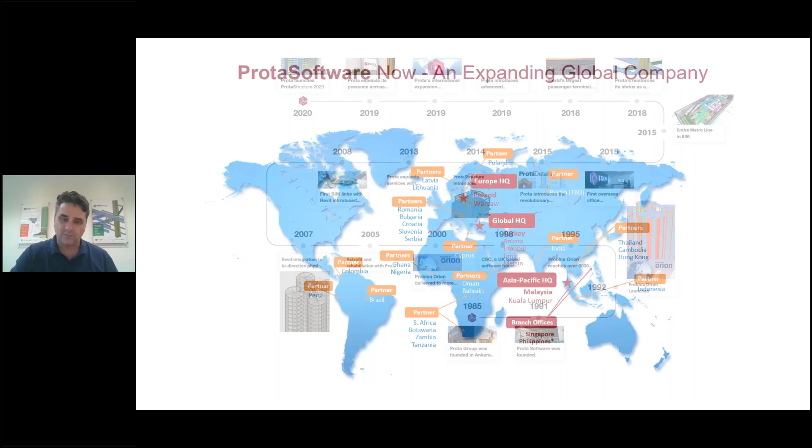I thought I'd give you some background about the company and a little bit of history around the software. We first started back in 1992, and we created what was then the first reinforced concrete design and detailing system, way back 28 years ago now - that was Prota Orion, and it was very successfully used for many years around the world. That was the first system of its type introduced into industry.

We continued to develop that, and in the early days it took a route of focusing on earthquake or seismic engineering, and in particular rehabilitation and retrofit of existing buildings. In places like Turkey, they have severe earthquakes, and there was a period where significant earthquakes occurred, and a lot of private and public buildings needed to be upgraded and retrofitted to meet new rigorous earthquake standards. We introduced a lot of capabilities on that front in the early 2000s.

This moved on, and in 2007 we were one of the first to actually integrate our physical models with Revit, so we had bidirectional links with Revit Structure many years ago, if you might remember. Being able to communicate that physical data is something that's carried on over the years and is quite a strong point of the software.

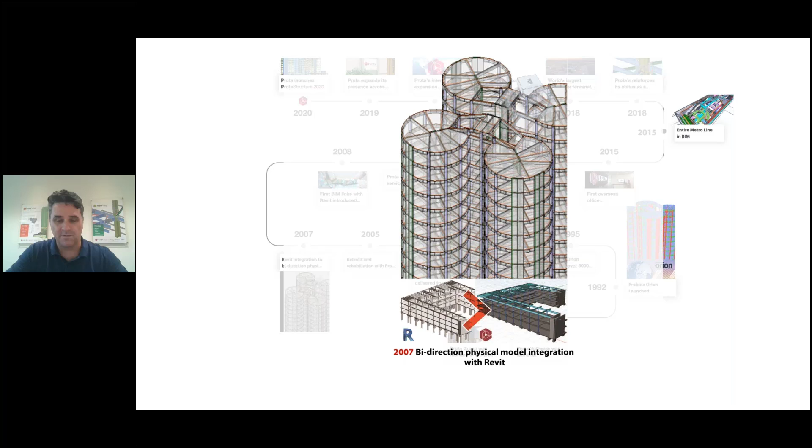We took the opportunity to redevelop the technology in 2014, and that's where ProtaStructure was born. ProtaStructure is a multi-material system for modelling, analysis and design, and I'll get to that in a little more detail in a minute.

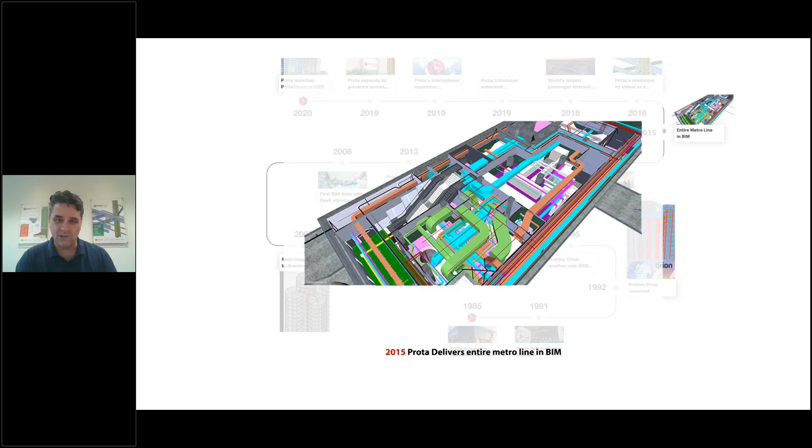Now, not to be outdone by us, the engineering side has also been heavily involved with BIM technology and implementing that on their projects. In fact, we were one of the first to deliver an entire metro line completely using BIM tools. From the architecture, the structure, the services, the construction, the alignments, everything being done using physical models and the latest BIM technologies.

That carried on, and then in 2018 we introduced the new international airport in Istanbul, which is, if you've been through it, I had the privilege of going through about a year ago. It's a huge airport, absolutely massive, and it's quite an interesting design and structure to service what will in the future be a very, very busy hub. So that gives you some insight into what we've been doing.

I just wanted to take the discussion into perhaps what you're doing as engineers, and I guess as engineers we like to emulate real-world physical scenarios. So to do that we create models, and they can be little wireframe analytical models through to physical BIM models. We then obviously need to move that down into actually looking at design, and the first stage of that is performing the analysis and then taking that into design.

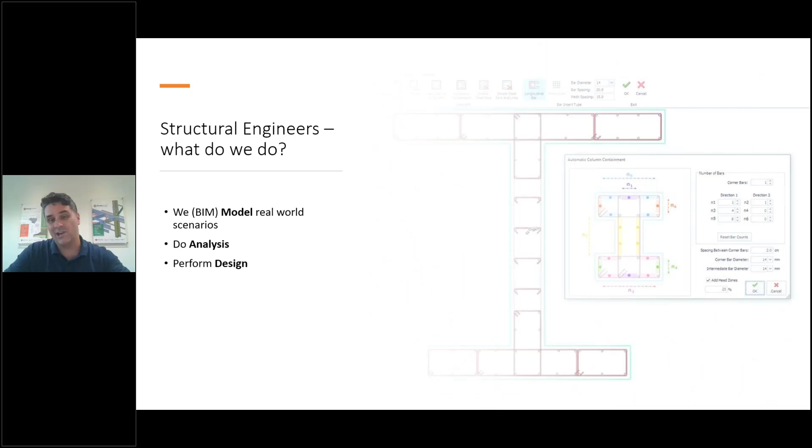So, designing all the elements within the project. Increasingly then you're having to communicate that in the form of drawings and create your detailing to convey that to site. Increasingly though, we're seeing more and more engineers and practices being asked to create fabrication or constructible information, and actually providing shop detailing, providing information to facilitate the construction.

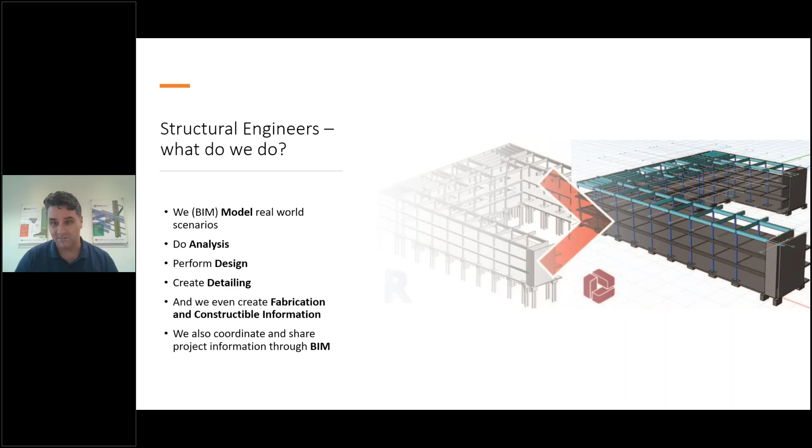And obviously a real hot topic at the moment is BIM and being able to share information, share physical information, data, all sorts of information which makes up building information modelling, and being able to coordinate and collaborate with different parties across different projects. So you, as an engineer, you've got a lot to actually have to handle - modelling and analysis, design, detailing, fabrication, and BIM. That's actually quite a lot to take in if you're a consulting business.

Now we recognise that traditionally you've probably been using discrete tools to help you deliver these processes. So you may have been using STAAD or SAP or ETABS perhaps for your own modelling and analysis. And they do some design, but mainly just elemental design, maybe component design, but some of them don't actually deal with everything. So you've got to design other things separately, things like retaining walls and drainage - you would have other tools for that.

So you've also got detailed design checks that are associated with the models - things like being able to check for lap lengths, checks for anchorage, all the other associated things that go into completing a design, and sometimes within these packages that level of detail is missing. So then traditionally you'd take all that information and pass it into a platform like AutoCAD. You might be passing that by just drawing up some sketches, handing them to a draftsman, who then goes away and conveys your intention into drawings.

But when you look at the CAD systems out there these days, a lot of them are quite generic - AutoCAD, BricsCAD, G-StarCAD - they're all just generic CAD platforms, not really dedicated to helping you with the kind of structural detailing that you may be typically doing. And then you may even be moving down into fabrication, and often at this point all of that information gets binned, and you're having to start building fabrication models from scratch, using different software like BOCAD, Advanced Steel, maybe Tekla Structures. There's lots of different programs involved with this whole process.

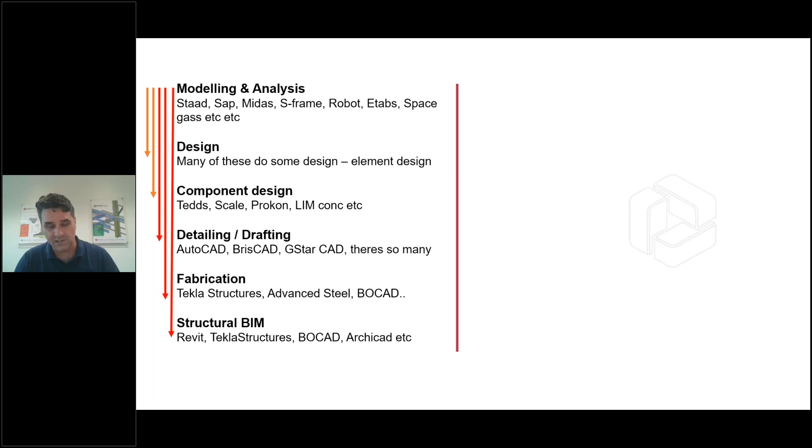At the end of the day, sometimes all this information isn't moving between these different steps. You're losing out on information held in silos, unable to communicate downstream as you move into the design process.

So what we've done is create a platform dedicated to modeling and analysis for buildings, a real dedicated program for that. Then that moves into design, right down into the detail, things like steel connections, concrete beams, designing core walls, foundations, and the like. Then we've developed a CAD software, a really brilliant CAD software focused on structural detailing.

That's about providing you with your structural detailing, and it also facilitates component design. So other items on a project outside of what may be required for a building, perhaps a retaining wall and the like, you have those components available to you as well.

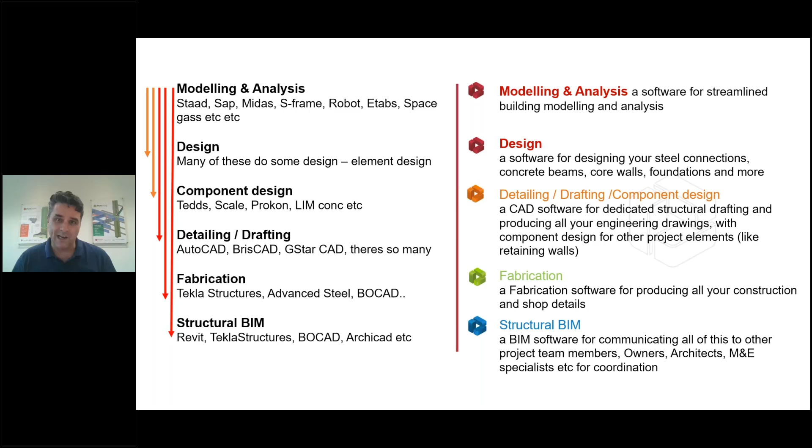And not forgetting fabrication. If you're looking at expanding the scope of your services, we've also developed a platform for aiding with producing fabrication information. And finally, a platform that allows us to communicate with other BIM platforms, structural BIM tools, other architectural and other types of BIM programs that allow you to communicate your project with different parties.

The idea has been to integrate all of this. So modelling, analysis, design, detailing, fabrication and BIM has now been created into one integrated platform, one solution. This has culminated, particularly this year, with the introduction of ProtaStructure 2021. So this whole vision is now coming together and starting to be realised.

So what I'm going to do at this point, I'm going to turn my camera off so you don't need to look at me anymore, and I'm going to actually show it to you. Rather than me spending time here talking, I'm just going to get in and show you what we've been up to. So I'm going to launch the ProtaStructure platform.

Okay, so this is our brand new platform. It's been rolled out to our user base. This was released about 8 weeks ago now, and any of our existing users should have this. We would thoroughly encourage them to start taking advantage of the technology.

The first thing people will notice when they first arrive into the new platform is a brand new interface, and we've got a brand new welcome screen that just helps you get up and running. Any projects you've perhaps been working on before can be loaded on the left here, and you can visualize those. We've got new interactive news and video feeds.

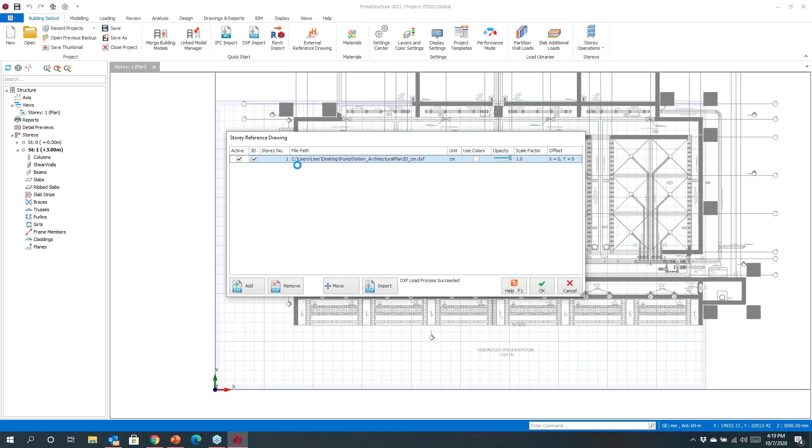So I'm going to come in and pick up a drawing, and this is actually a DXF file that's come in, and this file includes some predefined structural elements. I can come and choose the scale here I want to work with in the drawing, and we can show this in the plan view. Okay, and you can see here that this is actually a pump house drawing, and in this pump house drawing there are actually some structural elements which have been laid out.

So they could be columns, beams, walls. Now these are actually 2D information, but what we've done with this new release is that we're able to actually take some of this 2D information and extrude that into 3D. So we're trying to help speed up the process. So if you had old key plans from previous projects and you wanted to use these to perhaps create your structural models very quickly, you could take advantage of this.

Now I won't show you the slabs, I'll omit them, and I'll just pick this up, and you can see here that we've picked up the relevant layers.

You can default things like, if you've got two lines representing a beam, you want to signify a default depth. That can be done here, same with thickness of slabs. Then you can just import this, and what we're doing now is taking that 2D information and extruding it out, providing this in 3D.

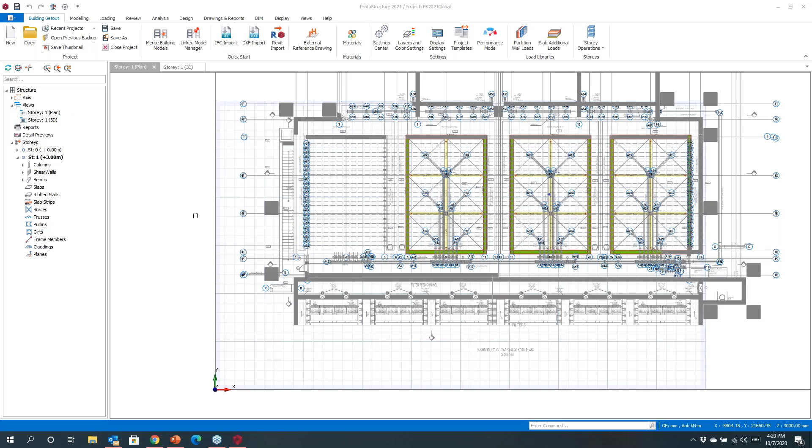If I just close this, you might see that there's some structural elements now in that model. I'll show you this - you can see it currently in plan view, and I'll show you what this looks like in 3D. You can see it toggling this, and you can see the 3D view.

So we've automatically brought in these elements, extruded them from the 2D information that we had. You can also see that we've got the overlay here - this is a pump house, and you could carry on and continue to model and enhance this. But it's just one way in which you can start to work with a range of different information from a project.

Now I'm going to create another one, and I'm just going to draw from a similar example, just to show you perhaps another way that you could work with this. This time around, I'm going to create a model from DXF data.

So this could be maybe a general analysis program - maybe you've been using SAP or STAAD or something like that. You've actually got a model and you want to bring that into ProtaStructure. Well, how would you do that?

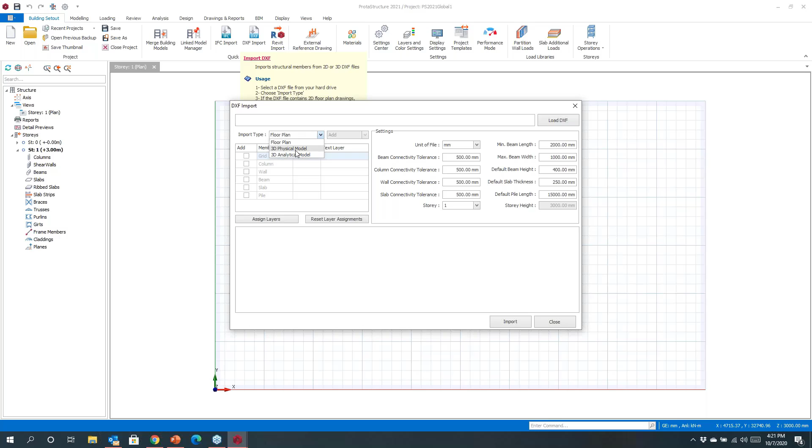So in here you can import floor plans like I showed you just now, but you can also bring in physical models or 3D analytical models which are in DXF format.

So I'm just going to choose a file here, another one, and I can just open this. You can choose the units again that you want to use. Okay, it's picked up the elements, and then I can just ask this to import this model. So it's now taking this physical model and re-establishing this inside of ProtaStructure 2021.

If you just give it a second, you'll see that something's been done there, and I'll just close this down. If I just show you this in 3D, you can see that we've taken what was quite a complicated wireframe model and brought this directly into ProtaStructure, and then we could just start working with this to develop other parts of the model, having this within the model.

So that's another example that you could make use of, and you can also try the IFC imports, Revit imports, bringing physical information in at the start of the project just to aid the modeling process. The whole idea behind this is just to give you more speed, more versatility, allowing you to use more of the information that you might have available to you at the start of the job.

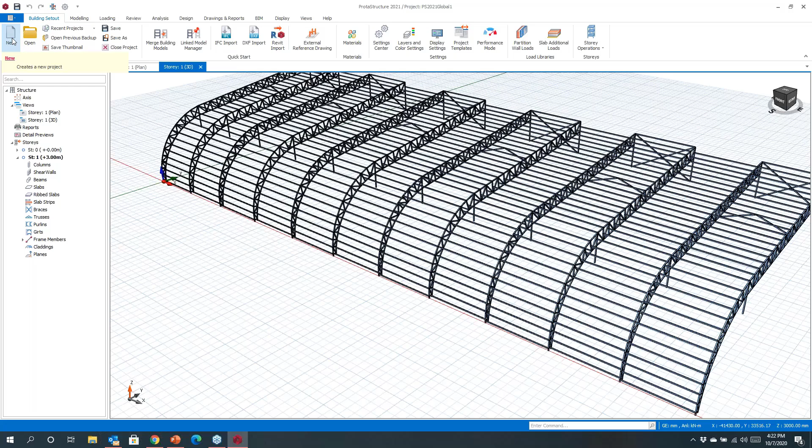Now, if you're not that privileged and you are wanting to just have to start from scratch, I'll just create another project here. I'm just going to show you that process, and work through a quick model here just to show you how you can take advantage of the new platform and the new technology that we have.

Now, for those of you who are familiar with ProtaStructure 2019, we've not tried to reinvent the wheel, so you will see that a lot of the dialogues that we have in here are familiar to you. So it would be a very natural progression for you, albeit that we're in this new interface.

Across the top here, you can see that I can start creating my model. I may just want to come and initially just set out some grid lines. I'm going to do that, so you can key in the axes yourself. If you had them in a CAD file, you could bring these in - it's very flexible. You can just import those, and then you can see that you've got the grid line arrangements there.

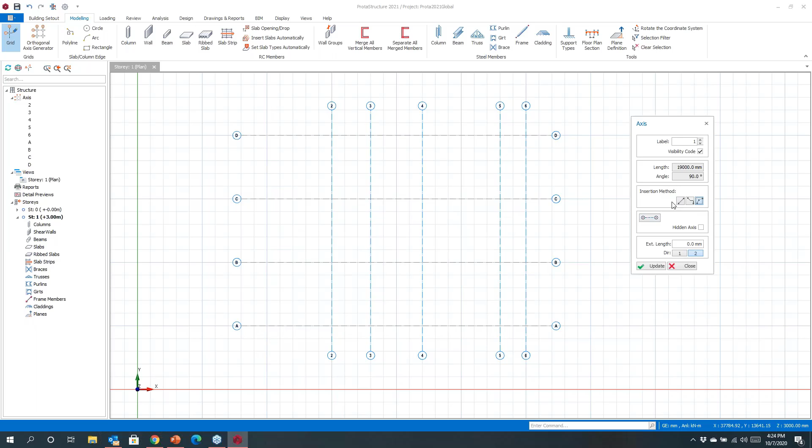Now, if you select an element and right-click, you can go to the properties of that, and you can see that the properties of that axis are associated there. I can come in and modify this - so if I wanted to maybe change this grid line so that it's actually a curved axis, that can be easily done.

Okay, I can just take this information and start to work with it to create what it is that I'd like to have within the model. So just selecting the elements, I can load the properties. I can come in and remove that axis, and then recreate the axis with similar labeling and properties on top of that.

So if I have a grid line that's not exactly straight, maybe it's an unusual grid line, I can come in and model that. Maybe it's a facade of a building. That's the type of thing you can do.

So if I just work my way across, next thing I might want to do is apply some columns here. And if I just click on a column, I can insert these and place the columns in the model. You can work with different objects here, different shapes, so you can create other objects there. I might want to align these along the curvature of that grid. I can easily come in and do that.

If I have maybe columns which have different properties, they could be steel, could be built up sections, cold form, or even composite. You can come and define these here and create them within the model.

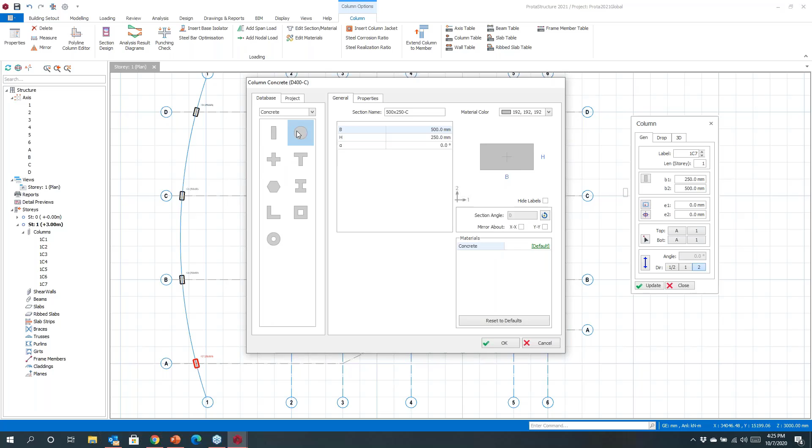So I'm going to put in maybe a concrete column here, could be circular. The underlying engineering properties are calculated, and then we can just come and grab these and put them in the model.

So quickly here you can see I've come in and defined some columns there. Now you can work with these if you find that maybe the column orientation here, I don't like it. I can just come and pick up a column, reorientate it, reposition that column. So all of this is editable if I wanted to move that.

Okay, I can also use my cursor keys, and you might just see that I'm just adapting this a little bit to suit the geometry. So you can just tweak things in here very quickly to suit the set out.

I'm going to put in some walls at this point, and I'm just going to run across and create the walls. Now what you might start to see is that there's a contextual ribbon here, and I'll explain a little bit more about this in a minute.

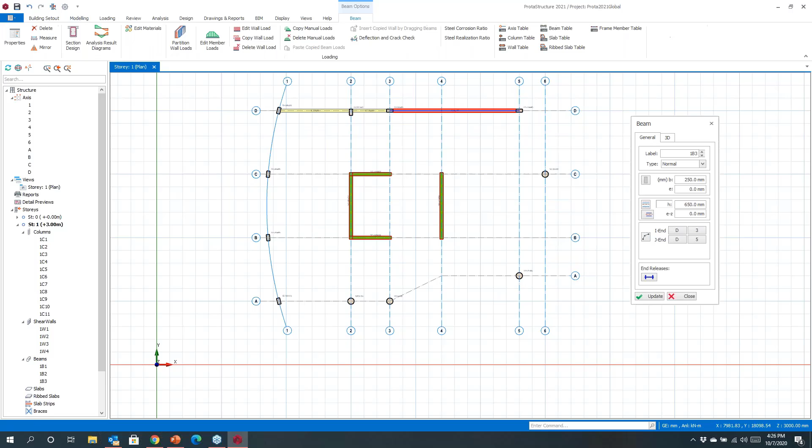But if I just come back to the main modeling environment, when I do start to put in elements like beams, you'll see that the contextual ribbon will appear, and this gives me additional features and functions that I could do as I'm creating these beams.

So you can see I'm just running around here. I'm putting in a funny beam that's followed the facade there, the diagonal beam. We've got some curved members there. I may want to just box around and put a lot of members in one area.

It's asking me if I want to split members. I don't want to do that. So you can see that I'm just really quickly coming in and creating the underlying model here. This is significantly faster than previous editions. You'll see it's much more responsive as you're creating the model.

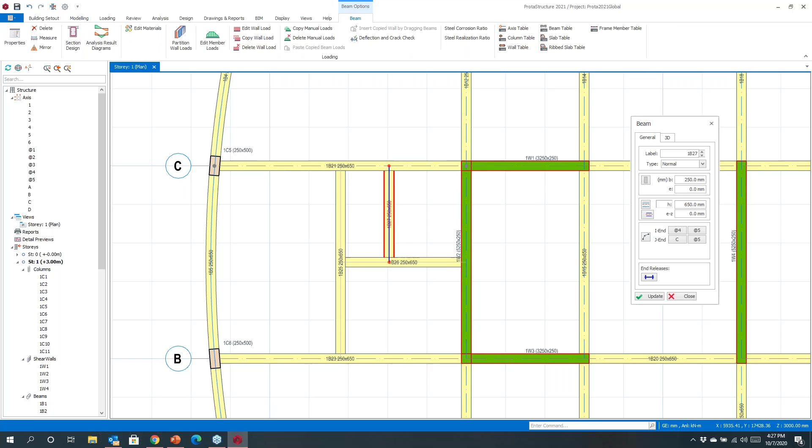Okay, you can snap to points, or you can actually key exact distances in as you're going to create things in here and position things accordingly. And as I mentioned earlier, you can just tweak these to adjust them to suit what it is that you're wanting to create. So if I want to move these columns into a different location, I can just adapt these accordingly.

I'll get into the slabs. So if we click on the slabs, you can key in a thickness. If you're not sure about things like live loading, there are tables in here that you can draw from codes. Eurocode, for example. It could be bedroom and dormitory.

If you're not sure about the superimposed dead loads, you can build these up in terms of libraries. So you can just quickly come and create these and create your slab location where you want it to be. Now, of course, you can key your own values in here. If you don't like these values, then this is all adaptable.

Okay, maybe you've got a toilet area with different types of finishes. Again, you can just come and choose those and put those in the model. Of course, you can key your own values in here too. So if you have a different live load value, then that could be established here.

Maybe I've got something that's a bit higher, just by the lift core there. It's entirely up to you, you can just drive this process as you go. Now I'm going to do some other things, reminding existing users of additional features as we go.

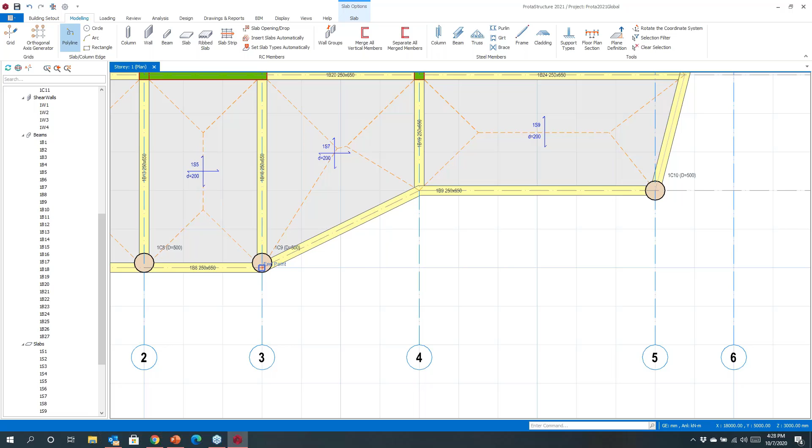We also have things like sketch lines that you can use to help set out unusual geometry. Here I'm running around creating a profile that I might want to use to define a slab. You can have different types of slabs and set these up how you want. I might make that slab a little thinner, or drop it a distance, and then just create that in the model.

Very quickly you can make use of tools like that to set out things that are a little unusual. Now, earlier I was talking about this contextual ribbon. If I click on a beam, you'll see along the top everything associated with that beam and additional features are highlighted to you.

You can also right click to get the same menu, but we've made this more interactive. So if I clicked on that beam and wanted to edit the wall load, I could interact with that dialog and create some wall loading on that beam.

Now that particular wall load, I can copy using Control-C. I could select some perimeter beams, and use Control-V, and it will copy and paste that information. We are trying to take advantage of familiar things that will be useful if you've been using other systems like Microsoft.

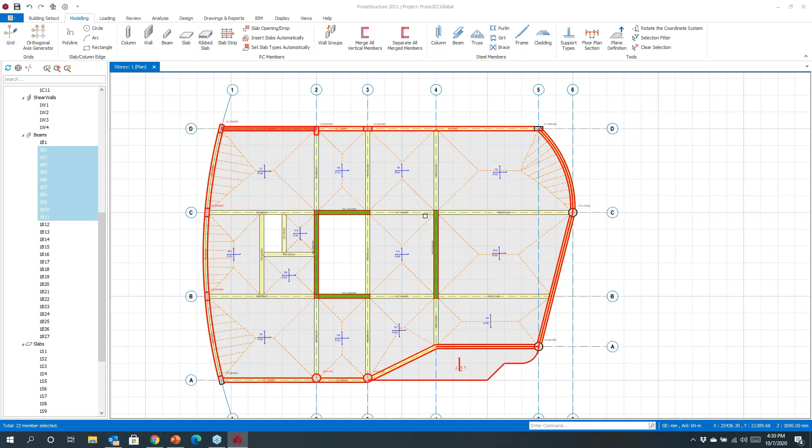Now I'm going to look at these walls in particular. If I select these walls, you'll see I then have the option to merge them, so that's now a merged wall. If I select that wall again, I've got the open dialog here. I could add extra loads to this wall, or go into the polyline wall editor.

We've done quite a bit of work with the walls in this release. Sorry, let me just load that again. It's loading. Let's try one more time.

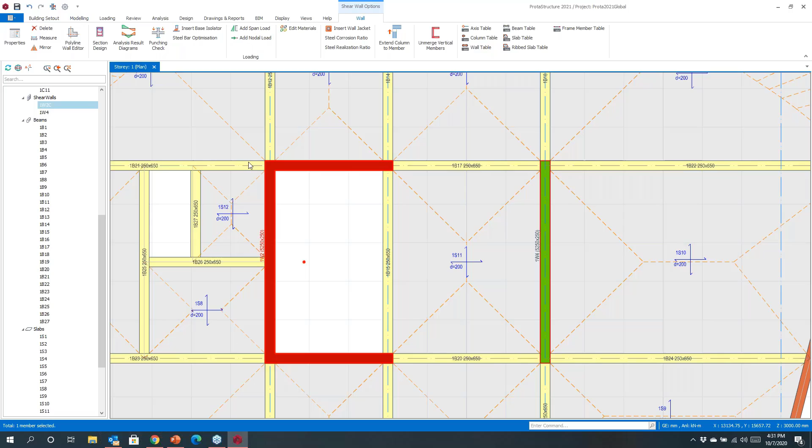Okay, so you can see the polyline wall editor here. This is an interactive wall editor you can work with independently. Maybe you want to introduce some end zone links. You can drive this manually and type in distances for things like end zones. These can be symmetrical, and you hit OK to create end zones.

You can also come in here and click to create other types of links, so insert a link around that whole boundary. You can use this just to define and create different types of... sorry, let me just get the way this is working properly.

So you can insert a link type here, make another link around the entire boundary, and drive this detailing. You can actually come in here and manually start to create and build certain specific types of detailing you might have for walls. But I'm going to delete that because that's quite a manual process.

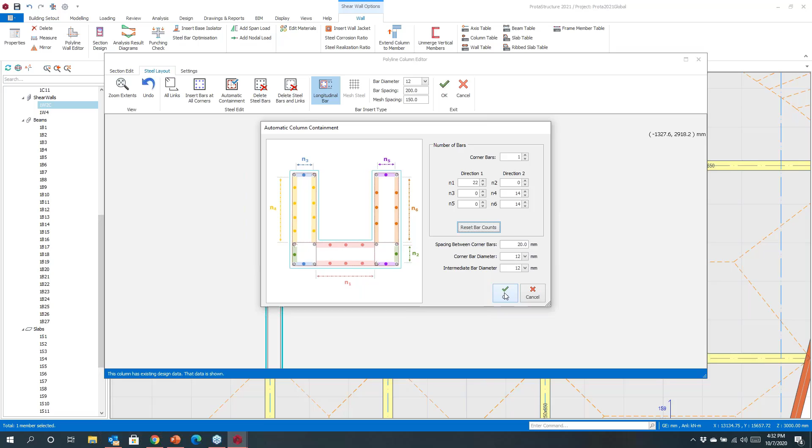What we've also done with this release is introduce automatic containment for unusual or merged wall shapes. So with just a click, I've actually created all the bars and a template that I'll want to use for design and detailing for the walls. Depending on the code of practice you're using, there may be specific detailing provisions required for seismic and the like, but this will adapt to those, and you can use this as a template for the design. If I just hit OK, it's now going to use those bars for doing design.

We can selectively use that for other types of elements. So if it was a polyline column, for example, you can work with these to create unusual geometry and shapes.

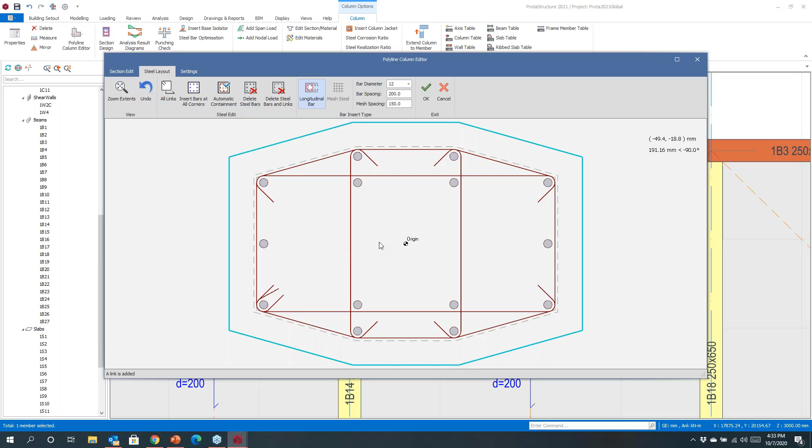So you're not constrained by what we have in the basic library. These can be driven, so you can automatically contain things here. I'm just drawing out some additional links and ties that I want in the column, so you can have multiple layers of bars. You can use this to define a template to create whatever you'd like in your model. All the standard shapes will be automatically designed and detailed, but if you've got unusual things, you can use this to help create those.

Now I've been working so far in 2D, and in the tree here we can come in and selectively open up other views. So here you can see a 3D view of this. These can be toggled, so you can look at different views. If you have another machine, maybe you want to pull views off to another screen. If you've got a couple of screens, you can take advantage of that, particularly with bigger projects, that would be quite useful.

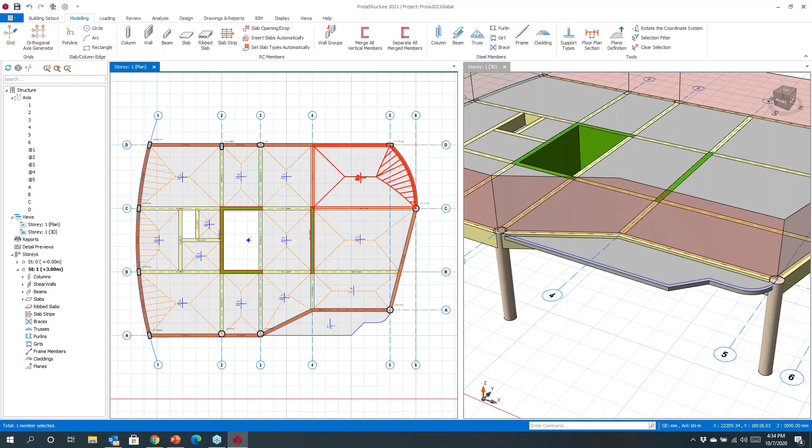I can then start to work with this further, working in both the plan view and the 3D model. I'm going to come in and create some other parts of this project. I might want to come in and create some openings in the slab, and we can do that.

If you've got things like polyline drops, let's just create them. You just bound the shape you want to use in this particular slab, and if I finish that, you'll notice that this slab is actually dropped. The idea is that I can create whatever type of geometry I have here, and we can use the physical model to help drive this.

If things have to move around, you can just reposition them accordingly. If you want to introduce an opening in a wall, this can easily be done. Maybe I want to change the dimensions of that. You can just work with this to create whatever it is that physically you would like to present.

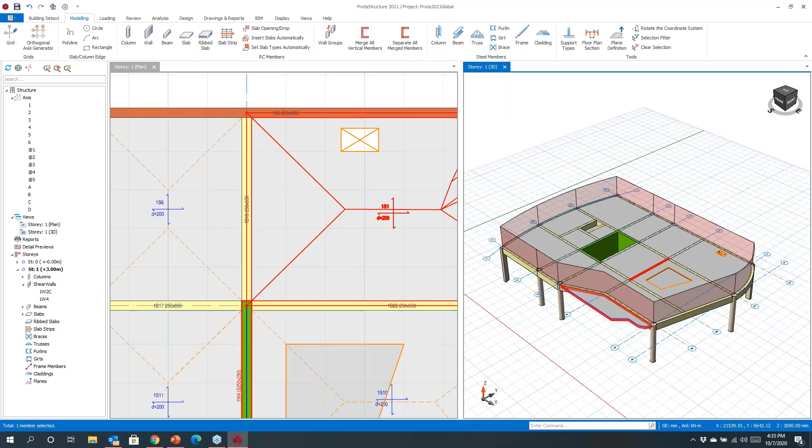Now, at this point, I may want to start generating information upwards. I'm going to insert a few floors, let's make this 5 storeys, and we can then start to take this information and work with it. If I go to storeys, I can right click and generate storey information upwards. You can choose what you want to copy, you don't have to copy everything, and I could just select these other floors. If I hit OK, you can see that information has been quickly reflected and generated up the building.

Now, you can interact with this model. It's very easy to make changes. If you want to delete elements, remove them, or make changes, you can.

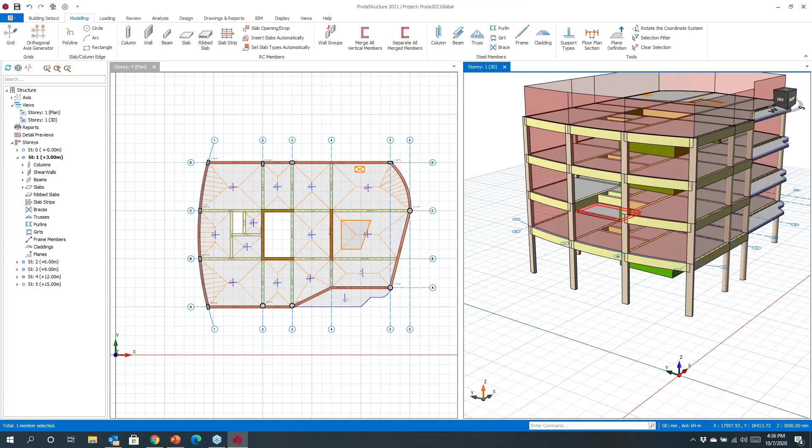Up here, you'll notice I've got an arrangement of beams at the roof level. I can come and choose to select certain elements in the model, so if I wanted to select the beams at that roof level, we could just box around them, and you can see they've all been selected. If I right click, I could remove those, so I'm left with maybe a flat slab at the roof level. We can then adapt this to suit the type of structure we want to create, so you have the flexibility to edit and make changes very quickly as you're progressing the model.

Okay, so I'm now at the roof level, and I'm going to touch on some new features we've introduced here as well. Let's just put in some columns initially. You can draw columns from libraries of different databases, so maybe I want to use a steel section, maybe a UC. We could just come in and select the appropriate section here.

Oops, no. Sorry, I've got a bit of a freeze here.

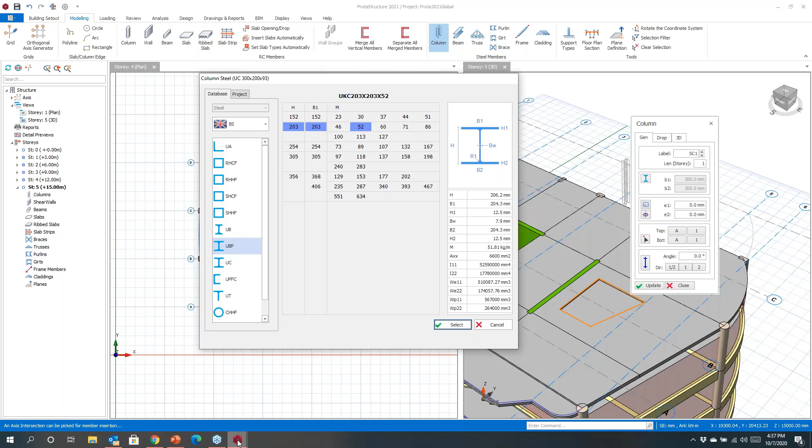Okay, let me try that again. Choose the section. Okay, let's go.

I can just take this and place it in the model. You can come and choose where these would be located, and these can be set out just to suit the project you're working with. Let me just move that box out of the way so it becomes a bit easier.

So they have a little steel structure at the top here. You can work with different elements here, and we've got these contextual elements. So here I want to create a truss. I don't need to key the nodes in to create that truss - I can just select between these two elements, and we can then move to create the truss in the model. Now, there are different ways this can be done.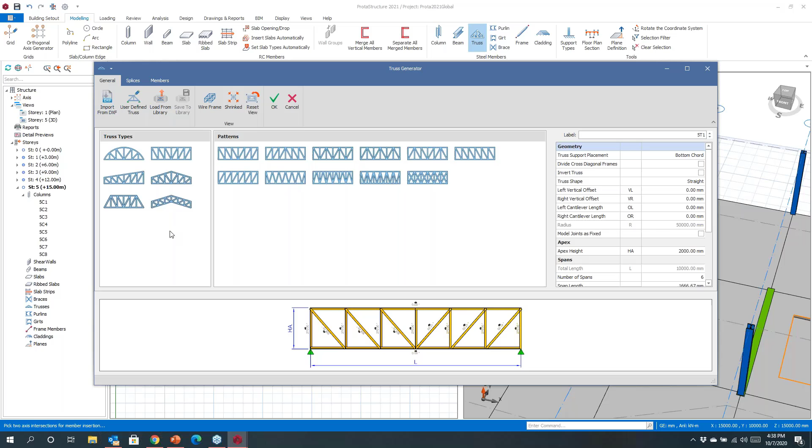Obviously we have a standard library of truss profiles that you can choose from here, and these are adaptable. But what we've also introduced is the ability to create whatever geometry you like. So if I had an unusual truss, I could make use of this to enhance the nature of the truss.

So I may want to put in maybe a top hat on this particular truss. You can key in some extra nodes here and coordinates, and you can see that these coordinates are created here. Now you can then work with these.

So if you wanted to add in extra points, I might want to add an extension point here for the top hat - maybe 500 millimeters this way, and then I want to create the same thing in the other direction. We can type that in and hit OK.

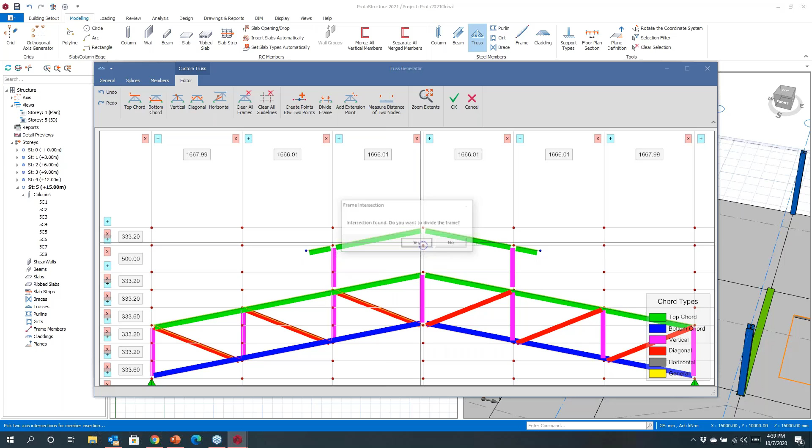Then we can just draw in the elements we want to have, so I could come in and draw these vertical elements here. I may want to add a top chord, so you can see the elements are grouped, and you can choose to define these however you like, then just come in and create the element. If you're happy with that, it could then be placed within the model.

I'm going to just remove that because I want to show you some other things as well. If I come back to the truss again and place this, you also have the ability to import from CAD.

So you could come in here and choose a truss that you might have sketched up in the CAD environment. You can play with the scales here, and then pick coordinates where you want the truss inserted - two coordinates to drive the insertion - and then you can import this.

Once you've got this in, you can work with the truss to help define different properties. So if I select this element here, I may want to set that as a top chord, so when it's being designed, it's designed as a top chord. The internals are the bottom chords - I could come and select some of the internals here and define what they are, so there could be diagonals, for example.

So you can work with this to create whatever it is you wish to work with in the model. If you have that information, if you've sketched it up in CAD, you can just bring that straight in and start to use it to define things.

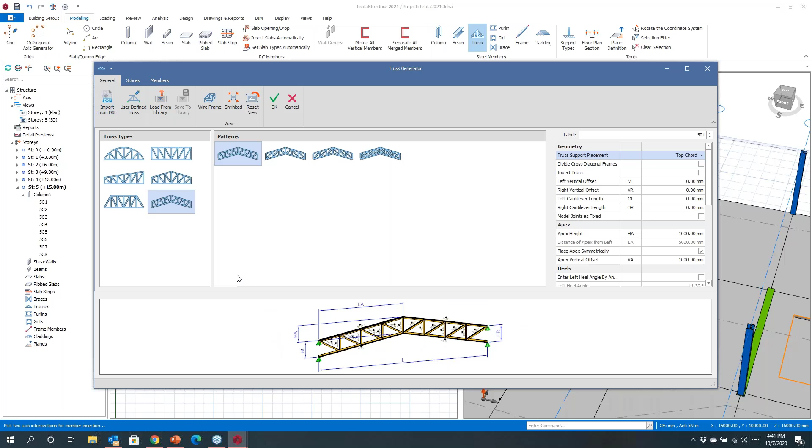Now I'm also going to create another - I might just use a standard truss this time, and you can see how this works. You can work with parameters here; these are very flexible, so you can use these to define the type of truss you might want to have. You can choose how things are aligned, and you can preview the truss before you actually create it. If you're happy with this, you just hit OK, then that gets created.

It then becomes available to copy and replicate elsewhere in the model. So I'm going to continue working with this.

Let's just put in, say, a UB, and you can choose different types of sections here at your disposal. I might want to play with the releases, so I want to pin each end of that, and I'm going to come and place my UBs here. So I can just quickly do that, and you can see that they're set up.

Maybe at the apex here, I want to change the section, so I might want to use a tubular section, maybe something a little bit bigger, and then I can come in and work with this to tie the top of the trusses together. So you can see here that I'm just working with the model to define these elements.

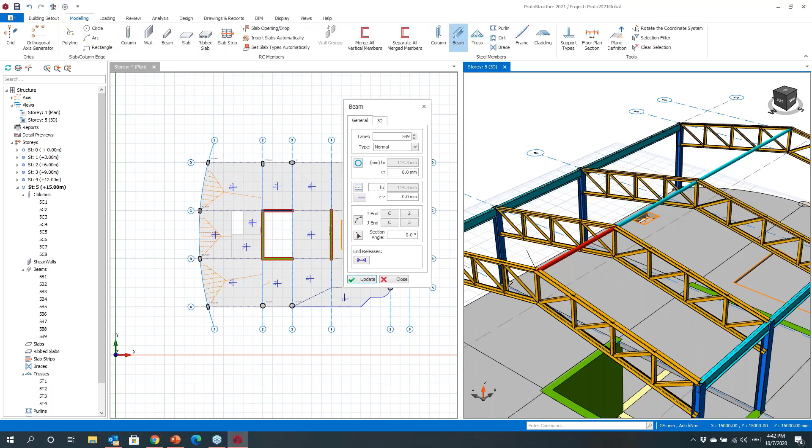Now, at this point, we may want to introduce other items, and we've got these other contextual modelling elements here. So I'm going to work with some braces. To insert braces, you can just click on these two, and it will preview a brace arrangement for you. Now, you can play with the types of shapes that you have here, how these are defined. All this can be set up here, and you can work with this if you want different types of braces - K braces, diagonals.

All this is adaptable. You can move these elements, so if you find that you need to adjust it on site, you can change that. The analytical wire can stay where it is, or this can move. So this is all adaptable to suit what it is that you would wish to create. Now, if you just hit OK, then those trusses get created, and those braces get created. You can replicate this on the other side, and the same properties will carry over.

What might be more challenging is this roof. So I've got a bracing system in the plane of these trusses here, and what we've introduced with this is that you can preview the trusses and the bracing arrangements here, and you can see the braces have been predefined for the top and bottom chords.

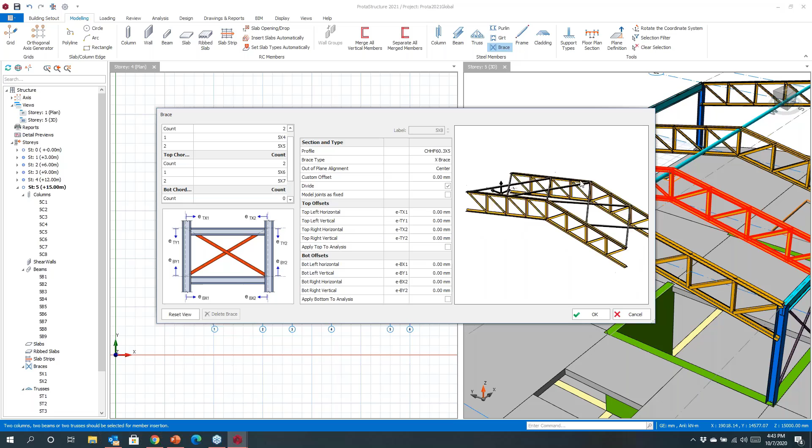And you can work with this, so I can make changes here. I might want to have a couple of braces on the top chord, and I may wish to have no braces at all on the bottom chord. So you can come in and define this, and then you can see that the preview there is adapting. And if you're happy with this, then you hit OK, and those elements will be created in the model.

Now, at this point, let's work with our purlins. So we can choose those end trusses there, and it'll also preview an arrangement for the purlins here. Again, this is an example where traditionally you may have had to go and draw all these purlins in if you wish to represent them in the model. With this, you don't need to do this - it's previewing an arrangement. All of this is editable, so if you want to change section sizes or use different types of profiles, in here you can, and they'll adapt accordingly.

Now you'll notice here that I've also modelled the sag rods. If I don't wish to include that level of detail, I can turn them off, or you can drive the way that they're detailed manually. You can also assign loads to this, which I'll get to, because we've introduced some other new features to help you with loads to this arrangement.

So if you're happy with this, then you can just select that, and that will be created in the model. Now the final few things I'm going to do in this model is I'm going to introduce some girts. So again, we can just click on the external perimeter elements there. We can click on the spacings here, or maybe I'll just turn those off. You can preview this, and if you're happy with that, then you just create - and again, those elements are created. I'll just finish this off here.

Now, the final thing I was going to talk about - a couple of other new things that we've introduced with this release - is we have a new option for creating frame elements. And these frame elements are very flexible, like a general frame element that you can work with. You can come in and make changes to use different profiles here to accentuate your modelling. So if you had a very unusual arrangement, you can use things like intelligent snap points to create that member and to set out unusual geometry.

Now, this member - you can fully control it. So if you want to release end moments, maybe you want to release torsional moments, maybe you even want to release shear - that probably wouldn't work very well. So you can play with this.

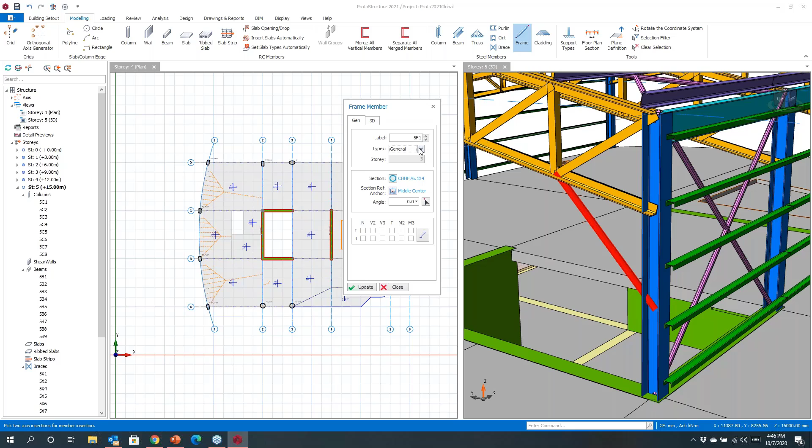You may have axial releases in this as well. All the render properties are fully flexible, so you can adapt this to suit the element in the model, and define these as other types of elements depending on what it is you're creating. This gives you the flexibility to create any unusual geometry you might have within your steelwork.

You can use the frame member element to create those models. When we imported those elements earlier, we started with the free frame member, and then you can define the type of properties for each element. For example, I imported the truss and redefined elements as top chord or bottom chord. Otherwise, they can be treated as frame members.

Now, another new feature we've introduced here is cladding. If I click on the cladding option, you can choose a panel of the roof. Let me try that again... okay, here we go. It should be a lot easier than what I made it look.

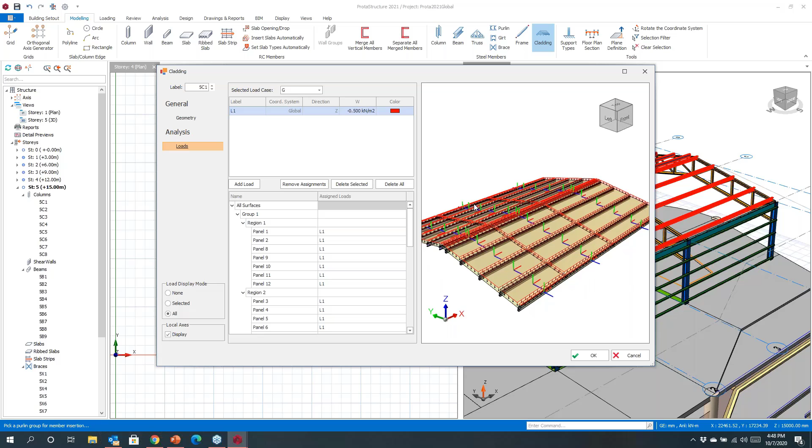So if I wanted to add loading, maybe the cladding loading for that roof, you can define the loading and then assign it to individual panels, or assign it globally to the whole roof. I've now assigned some dead load to that roof - it could be live loading, wind loads, or snow loads. You can come in here and establish those pressure loads on the model. It intelligently understands that's a surface, and then allows you to set up and create those loads and apply them to the model.

Okay, so we've covered a bit of ground. Now I want to look into the modeling analysis and design. I'm going to quickly generate some combinations here. Your pattern load cases as well as your lateral cases can be established here. I'm going to run wind loading as well as seismic. If I just hit OK, all your combinations are automatically generated for you, created in accordance with the code.

Seismic parameters can be established. Depending on the country, we have seismic maps you can draw from - here's a map of Malaysia, and you can choose an appropriate city to use. These will adapt - you can choose different ground types and the like, and each of these will follow through the associated code you're using. So whether you're designing a building in America or a structure in Thailand, there are various codes we support that allow you to create whatever type of loading you wish.

So I'm going to choose to run 10 modes here. We do some quite sophisticated regularity checks, and we do some really smart things for joint shear checks as well as strong column weak beam design. You can check those out - there are other webinars that cover this in more detail, but that's just to give you a quick overview.

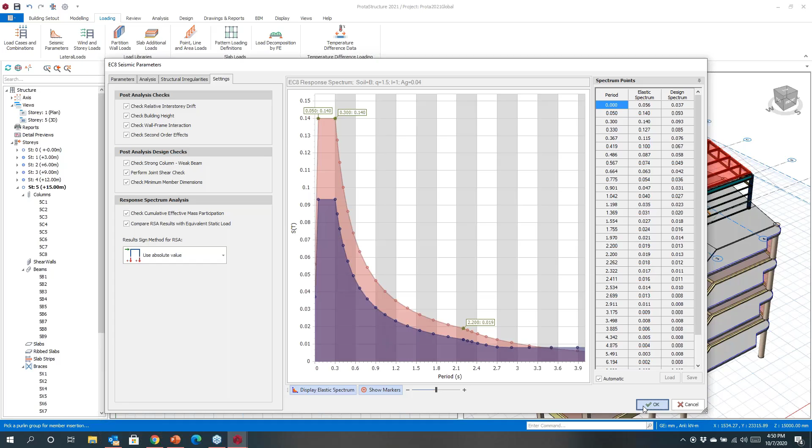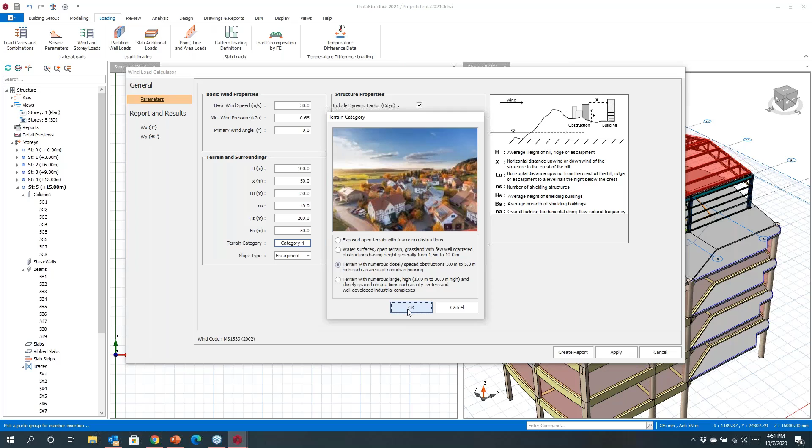Now I'm just going to quickly save this because I want to populate the geometry to allow me to do the wind loading. Wind loading is also automated - we cover a range of different codes, whether British standard, Eurocodes, or American codes. In this case, I'm running this to the Malaysian standard, which is a direct copy of the Australian code. Here you can come in and key in your parameters, your basic wind speed, topographical considerations. You can choose where the structure might be located, what type of structure it is, and work your way through the relevant code of practice.

We then automatically calculate the loading for you - pressures, loads, and so on will be automatically set up, and then these can be assigned and applied to the model. So this takes you through the process of setting up and establishing your loads.

At this point, you may want to quickly review the model before you get to the design. This review section allows you to quickly check things like your live loading, your superimposed dead loads on the slabs. If you've got different types of column sections, you'll be able to see what's being created in the model here, beam sections and the like. So you can just use this to quickly check your model before you get into the analysis and design process.

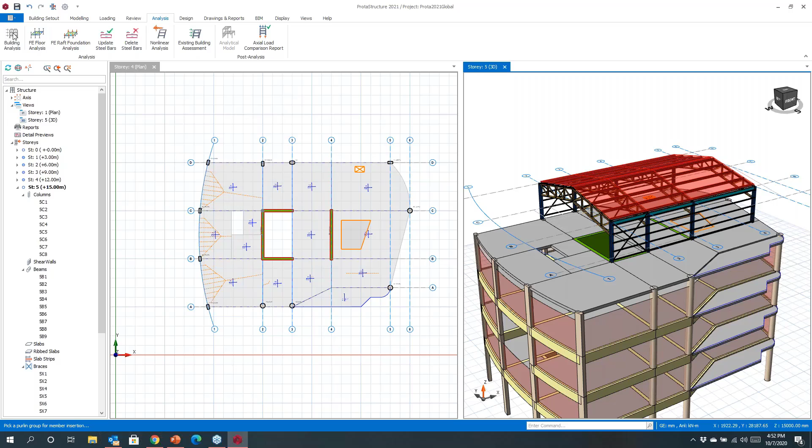Now I'm not going to take you through the analysis and design process. I do, just before I do that, touch on that there are some very sophisticated non-linear and building assessment capabilities that we've introduced with the 2021 version of the software that you can take advantage of. I'm not going to touch on those today - I'm just going to go through and do a quick analysis and design.

The parameters are here, and you can choose different codes of practice. You'll see that there's a big range here that you can choose from. This is defaulted depending on the template that you're using. The seismic parameters - we've established loading and so on has been set up.

I'm now just going to create the model. I'm going to use rigid zones for my model here. You could design beams as flanged or rectangular. I'm going to also mesh the walls, and I'm going to mesh the slab. So I'm just quickly going to choose to mesh the flat slab here at level 4. We can do that, and then I've chosen that, and that will be meshed.

Now the analysis is a button - we can just choose this, and then we can ask it to perform and move through the analysis and design processes. With this release, we are now fully 64-bit, so the solver and design processes have been streamlined. You'll see, if you're an existing user, that the analysis and design processes are significantly faster than the hybrid version that we had with the 2019 version.

You'll just see as it's progressing here that we're really streamlining the way it moves through the analysis and design processes. It's taking advantage of multi-core processing, it's taking advantage of multi-threads. We're trying to really maximize the speed and responsiveness of the analysis and design engine.

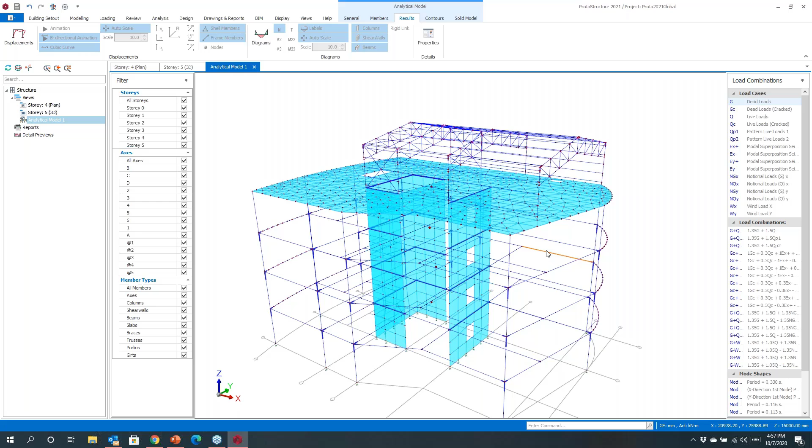But if I'm just going to come and look at maybe just the analysis model here - this is a new post-processor that we've introduced with the 2021 release. It was sort of started to be introduced in the 2019 version, but we've brought this in here fully with this release. You'll see that you can click on this and it's lightning quick.

So if you want to look at various results here, you can just choose what it is that you want to see. Maybe I'm wanting to look at moments in the walls there. You can see that we've resolved all these for the core walls that they're combined. You can choose to turn things off, so if I don't want to see the shear walls which are dominating the moments here, you can just adapt this - now I'm just looking at the beams, a more clear representation which isn't being dominated by those core walls. Of course, I can turn those back on. You can just adapt the results to suit here.

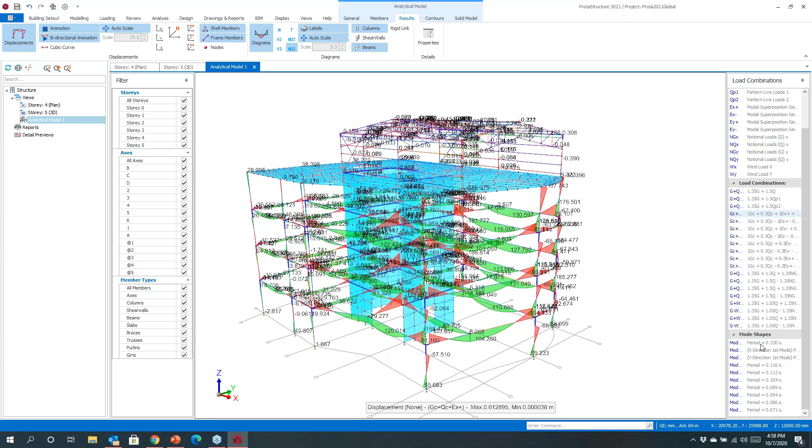If you want to look at other things going on, you may be interested in displacements and want to see the animation of the model - you can. This is instant, so if I wanted to look at, let's say, the modal behavior of the building, you can see this is just instantly rendering, instantly providing you with a view of how this is behaving. This is lightning quick - I've never seen a processor as fast as this. It will just prepare and preview all this data for you.

Of course, you can look at other things in here. So if you wanted to turn off the animations for the time being - maybe I'd like to see the contours. Then you can look at various contours in the model. Again, you can turn results on and off, so if I don't want to see the moments there, I just want to look at the stresses. Maybe I'm interested in only seeing the contours in the wall, so I could just turn off the slabs there, and then I can just focus in on what it is that I'm interested to view. You can choose to maybe turn the diagrams back on again.

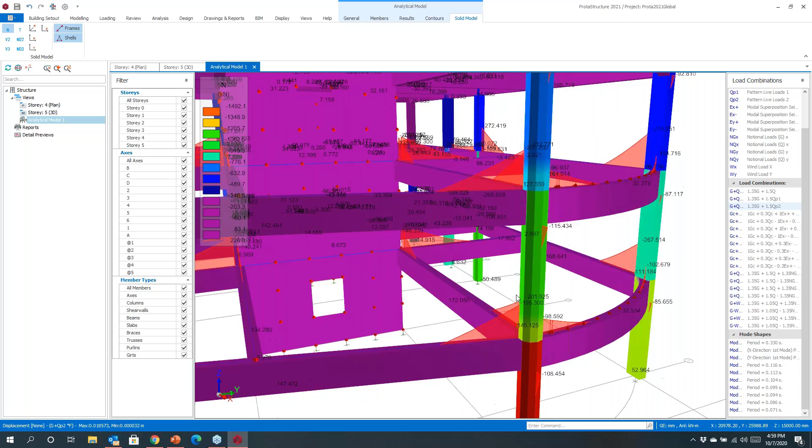There is another view here called a solid model, and this is just for a little show. You can see here the model, you can look at the moments in here, you can just get a feel for the behavior here and how this looks. So there's some nice things going on with the new analysis post-processor - it's really fast and interactive here.

So now I've come in and sort of designed the model here. We can come and look at the design status, so you can see that the structure has been designed - instantly you can see the status of the model. You can start to interact with this. So you could, if you wanted to come and look at a particular beam, you can just select the beam from the view, and then you can see the loading view of the beam.

Now, this is new - we've enhanced this quite significantly over previous versions. You can see the interface is slightly modernized and different. You can click on things like diagrams, and you can see the diagrams of the results of the envelopes here. You can look at individual cases here, and choose to see what it is that you want.

So if you want to look at torsion in the member, maybe you're wanting to see relative displacement of that beam under a certain combination, maybe it's a dead plus live case, you can interact with this, and you can see here that you can just walk around this and really interrogate the results. This is very dynamic, just allows you to get in and explore the results here.

These are also dynamic, so here you can see the rebar results. If you make changes to it, this is all live.

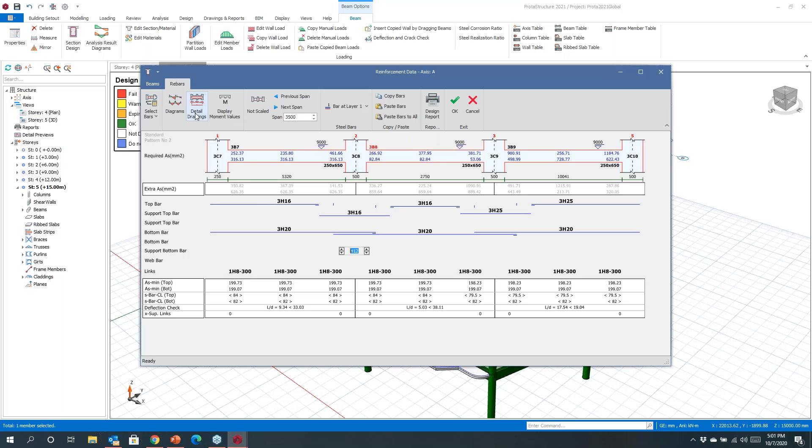If I wanted to copy this rebar to this, you can just come in and do that, okay. Now, even before you get to actually producing detailed information, in here you can preview what the detailing is going to look like. You can see that beam and how that's being detailed out.

You can get a view of that before you actually move to document things. Similarly, if you go to the design, you can look at the various components here. So if I want to look at the columns, you can see the columns here. You can click on a particular column and interrogate this in more detail, see things like the interaction diagram with the detailed design checks. You can also look at interaction plots.

So all of this information is available in here that you can interrogate, and we've modernized this interface. We've also added enhancements and tweaks in here as you go.

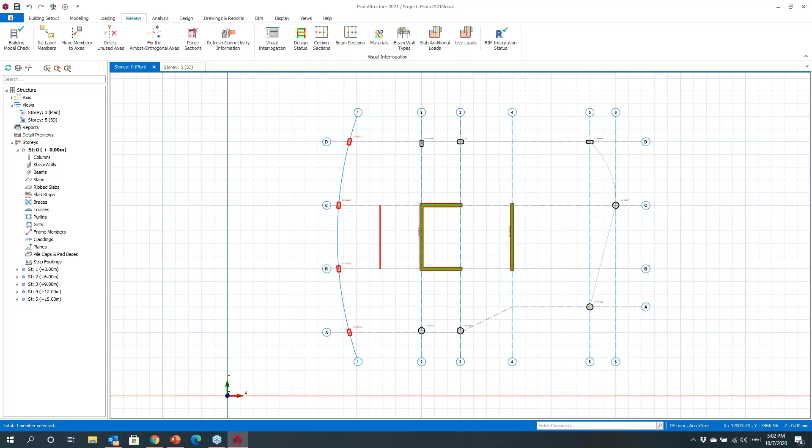Now I'm going to go down to the foundations. We've introduced some new things in the foundations as well with this release. If I just select these perimeter columns here, I have the option to insert a pad footing, or a combined pad footing if I've got columns that are very close to one another. Similarly with the pile cap, it could be a pile cap or a combined pile cap. You have the options to insert these here.

So if I chose a pile cap there, taking the results from the analysis, we can then move in and design the pile caps. You can define your loading here, and once you've done this, you can design it. It's now just batch designing all the foundations in one shot. These are all being done, and you'll see that it's populated those into the model. So these are passed, and then you can see the foundations there.

Now, a new thing that we've introduced with this version is also pad base design. So if I just select these, I insert a pad footing. You'll notice that the pad footing is being designed, and then I can just ask that to design all of these. So they're all being designed in one shot. You can see here that that's been created. And if I hit OK, you'll see that our pad bases are now realized in the model.

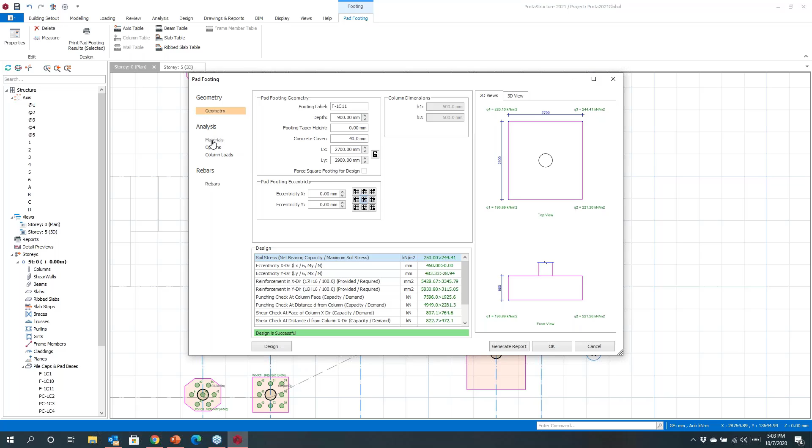Now, if you want to come in and have a look at this in more detail, you can go in and individually look at individual bases. You can offset them if you want to move the column or the pad eccentricity around, and you can play with different material options in here. You can even use your own user-defined loading if you wish.

Another interesting thing here, which I'm going to get to later, is that if I just click here, you can see that there's this new 3D rebar view. We're now taking all that information and creating 3D rebar and 3D visualization of this within the model. So in here, within these component designs, you can start to see how this might be constructed and pulled together, how this element might actually be built. So that's just a little preview of that, and you can see how that works.

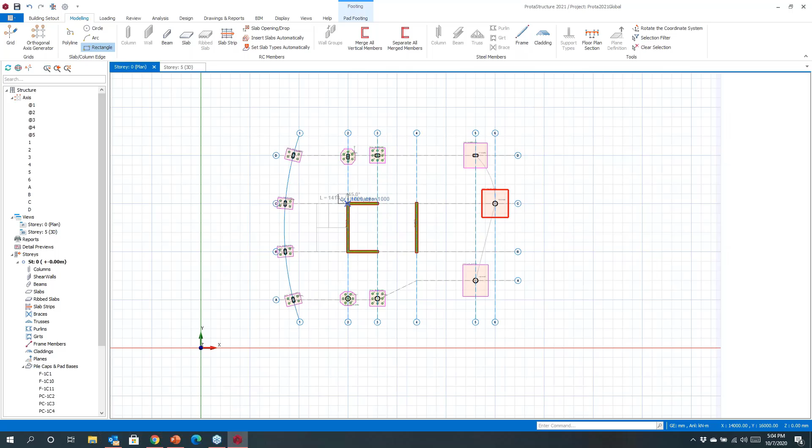The last thing I'll do in here is I'm just going to come and create, maybe, a raft for the base of the model here, which I can do. Now you can design these using finite element analysis if you wish. I'm just touching on different capabilities here that you can take advantage of in the model, depending on what it is that you want to achieve. So let me just come in, put that in, and then I'll just use that boundary to create that element.

Okay, so we've got our model. I'm conscious of time, so I'll talk for about another 10 to 15 minutes and we'll be done. I just want to quickly show you how you can pull all this together and document things out in ProtaStructure 2021, and how this seamlessly links into creating drawings.

So here I've done this, and now I'm wanting to create my drawings and reports. There's a new thing where you can preview things before you actually create them. So if I wanted to look at the elevations of my columns for my first story, before documenting them out, I can preview them here and see how things might be drawn up before producing those details.

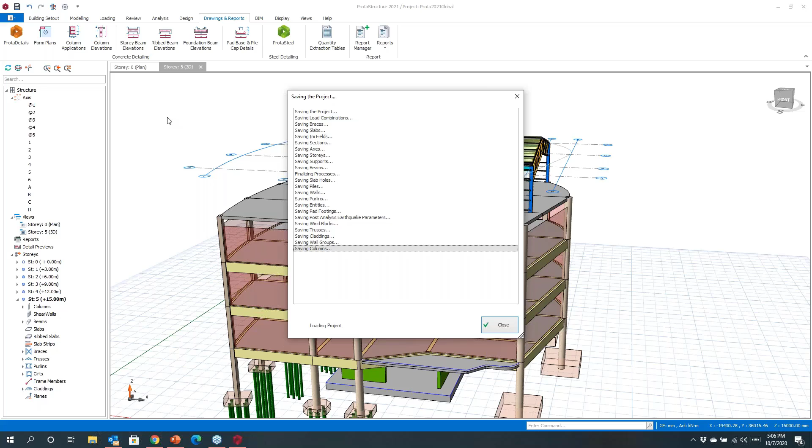So I'm going to load ProtaDetails at this point, and then show you how we can quickly go and create all this output that we've been working on over the last three quarters of an hour. To do that, I'm just clicking on ProtaDetails. This will open up the ProtaDetails part of the platform, and this will allow us to move in and create all the documentation. Just give it a second - you can see it's come to life. You can have this open concurrently, or just launch it as and when required, and we're now moving into the documentation side of it.

I'm going to be very quick here. What I want to show you is that you can come and create your documentation seamlessly. Everything we've designed and created inside ProtaStructure is now available to detail out. I'm going to insert this to a sheet, choose my title block here. You can play with naming conventions, scales - everything here can be manipulated. You can even play with things like how beams are truncated and the like. All this can be edited in here.

We then want to come and create. So once we're happy and know what we're going to draw up, we can let ProtaDetails spring to life, and it will go away and start producing all the various documentation for the model. You might see it's laid out the title block, and it's now intelligently looking at how it can arrange everything into our sheets. It's trying to intelligently organize everything for us, and you'll see it working through that process - you can see some of the detailing for the foundations being provided, and it's organizing everything into your sheets.

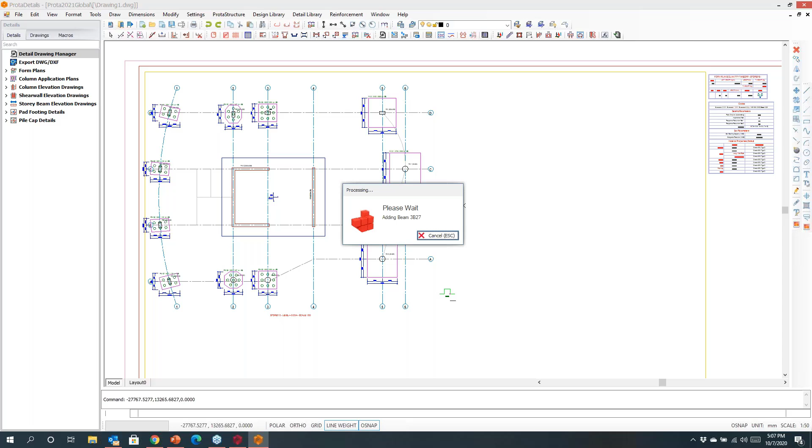Now you can do this element by element - you don't need to publish everything in one go. It just depends on the nature of the building, but this isn't such a large building, so I'll just do this one go.

Now if I come out, you can see that everything is being drawn up. So all our output has been automatically created and published into our drawing sheets. You can see here our foundation views, our plan views - all things like line types, layers, and styles, all customizable to suit your preference. This will be your title block, just gets laid into your sheets.

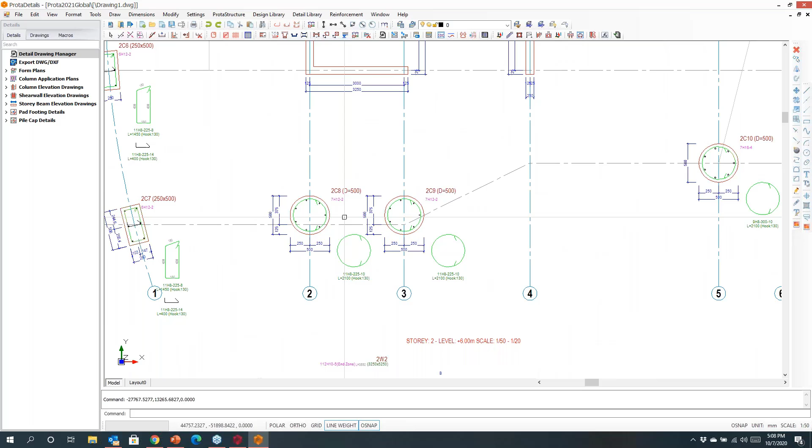You can have different types of information, set out drawings against grid. You've got things like openings, walls, and elevations can be drawn. You can see column elevations here - even that irregular column we created earlier has been properly detailed out. You can also produce schedules, and we'll do smart things like group the columns for you, so it understands what's similar and draws out what's necessary, trying to rationalize the design and the detailing.

Similarly, you can see the walls there - the steel percentages are less than 2%, so it's omitted the ties. Things like this will be taken care of as part of the design process. You can see the beam detailing here and how that's been created. What you'll also notice is there are rebar marks, so that's positional mark 8.

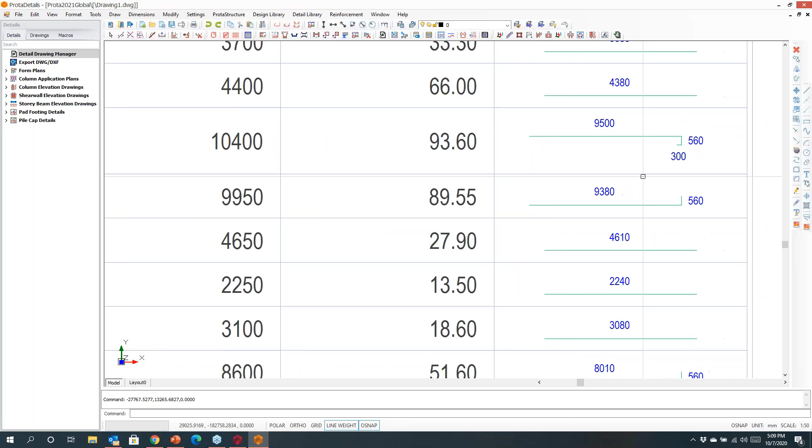And over here you can see that for that bar, there are 20s, nine of them, 10.4 meters in total, and here is our bar bending schedule. So I know for this drawing there's about 1,300 kilograms of steel - that includes all the laps, links, and so on.

So this is how we go arrange things. There's also your foundation details as well. But you get the idea that everything here is being automatically created in the system and organized to suit.

Now the system also has a library of components, and you can come in here and design various components. These will produce the design as well as the details. So if I want to design some stairs, I can key in parameters, loadings, and so on. We can design these, and then produce the design documentation.

So it will create the reports, the detailed design reports of these elements, which you can preview. Calculations to various codes of practice will be highlighted to you in the design. They can be documented out, but then we produce the details. So we then use these elements to actually create component design.

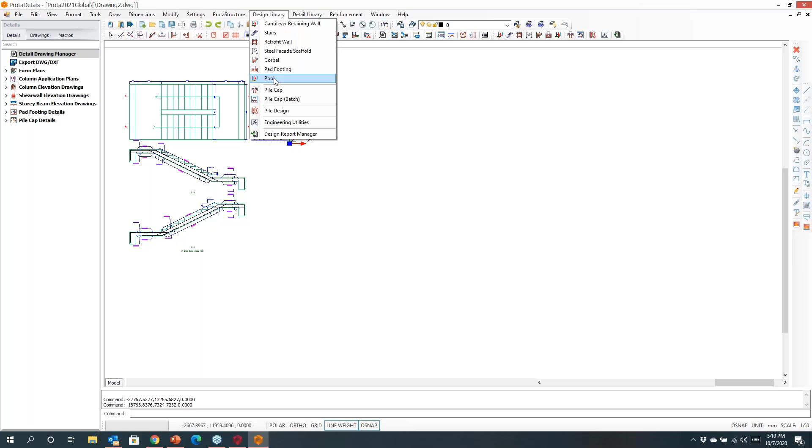With this release, we've also introduced some new calculations. So the pad footing that I showed you earlier is available here. It's a standalone element. We've also got a new swimming pool design, and I'll just quickly show you this and a couple of other things, and then we'll call it a day.

So here you can see a swimming pool. You can choose - there's different galleries here that you can choose from. You can key your own components in here.

This one also has the ability to define a soil profile as well as soil surcharges, which you can edit here. So you can key in an appropriate surcharge value. If you're happy with this, then that soil model gets applied to those walls, and then you can ask it to design. So it's now designed that structure against that loading.

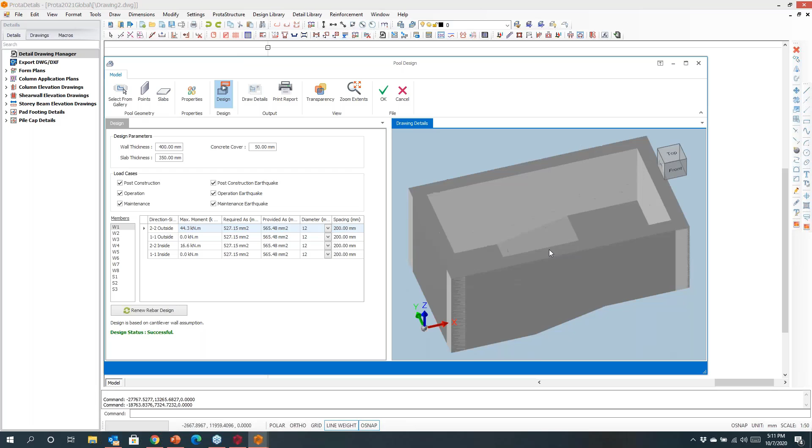And another interesting thing is that we're also making use of the 3D rebar here. So you can see in 3D all the rebars being laid out for that swimming pool. I can create my report, or I can just move straight to actually creating my details. So here you can see that we're taking advantage of that 3D rebar, and we're using this to create the drawings for that particular swimming pool there.

So all of this just gets created within Prota Details. All of this can be done. Prota Details is also a complete CAD system - you can draft in here.

But that's enough on this. I think if you want to find out more about this, we've got some other events coming up that we can highlight this. Now, the last thing I'm going to touch on in the last 5 minutes or so is ProtaSteel, and I'm just going to take this model out to ProtaSteel.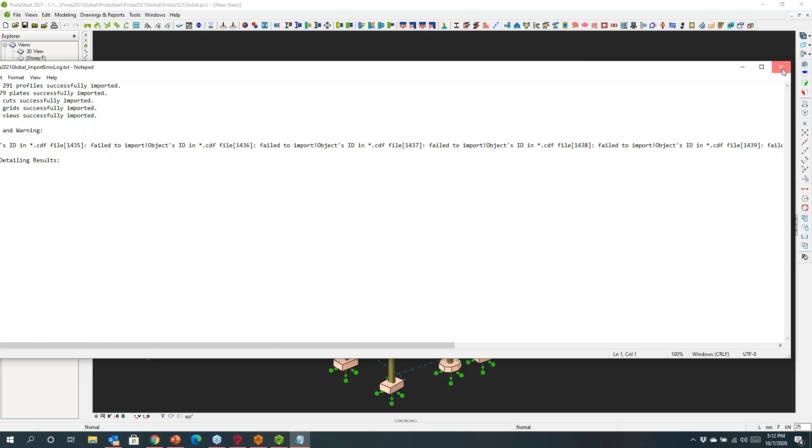Again, seamlessly working with all within one integrated system to move into looking at our fabrication and associated detailing. So here we can see the model - you may see all the steel work and reinforced concrete's been communicated in here.

At this point on the top, you'll see that there's a whole lot of different macros here that we can work with. These are all different types of connections that you can use, from bolted, welded, gusset plate, pin plate, end plate, you name it, it's in here. Connections to concrete, base connections, even things like embedded plates, things like railings, checker plate, the whole lot is in here. And the idea with this is that we can just come and choose an element.

Maybe I want to come and connect this purlin to the truss. We can just come and choose elements here, and as soon as we connect, that connection is being automatically designed and physically provided within the model.

We can choose other types of connections. So if I wish to, maybe I want to come in and connect this beam to this column. We can come and choose maybe an end plate connection, and we can come and create that. You can see that's been done.

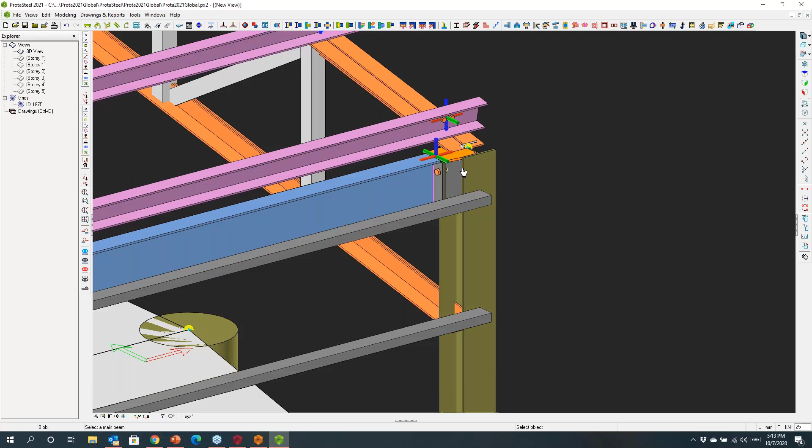Now, if I select this connection here, all this is being documented - there are reports in here. So if I want to see a comprehensive design report to, for example, the American Code, British Standard, or the European standards, these are available in here. And you can see a step-by-step detailed review of all the design calculations that go into that calculation check.

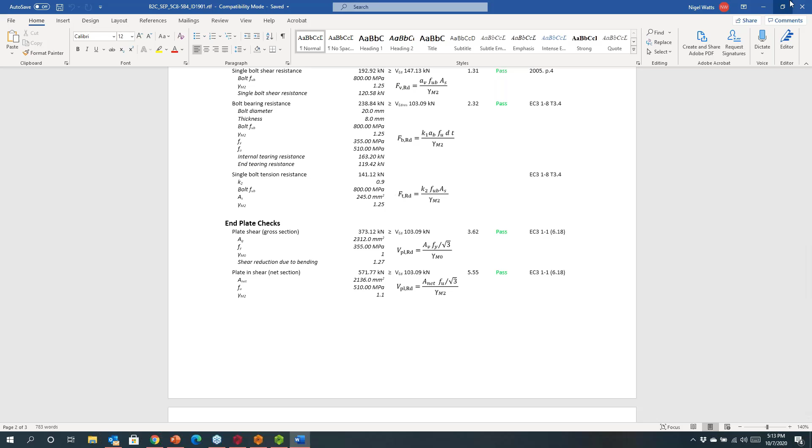So all the loading automatically is coming from ProtaStructure, and we're automatically designing all this to your chosen code of practice. Now, if I had to do that for every single element in here, it might take me a bit of time. So we have a really revolutionary software part of the program called IntelliConnect.

This allows me to come and design things like purlin connections very, very quickly. It's now just automating the design of all the purlin arrangements in the roof there. You can see here that we've created that, so the purlin connections have been created. It's very intelligent, it understands when things like those two purlins are butting up against each other, and I need to have a longer angle cleat to connect those things in. You can just take advantage of this.

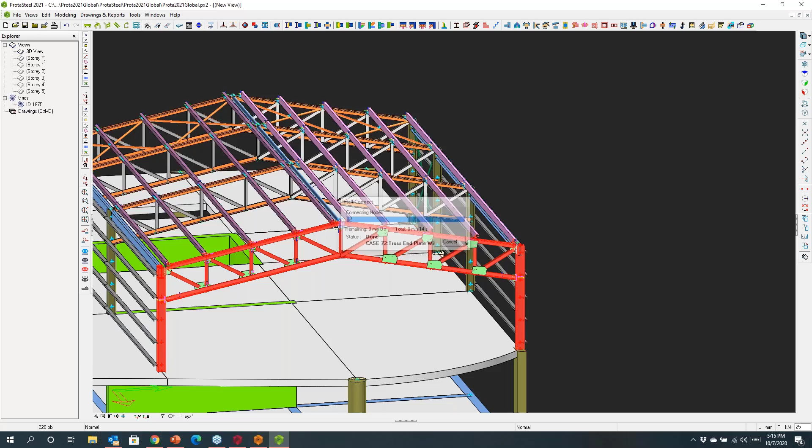What I can also do is use IntelliConnect to help me design the internals in that truss. I'm just going to run the truss design, hit go, and you can see it's moving across and designing all those internal connections within the truss. These are physically providing those connections, cropping them, rationalizing them, coming up with the most efficient and practical way of designing and detailing these.

If you move in there, you can see the connections have been designed, and you can move along the truss and look at what's been created. You might notice these are slightly sticking up - these are macros, and any of these you can come in and work with and edit. So if you want to tweak the detailing, maybe drop this plate a bit and extend the plate at the base there. You can apply that, and you can see it's just been adjusted to suit.

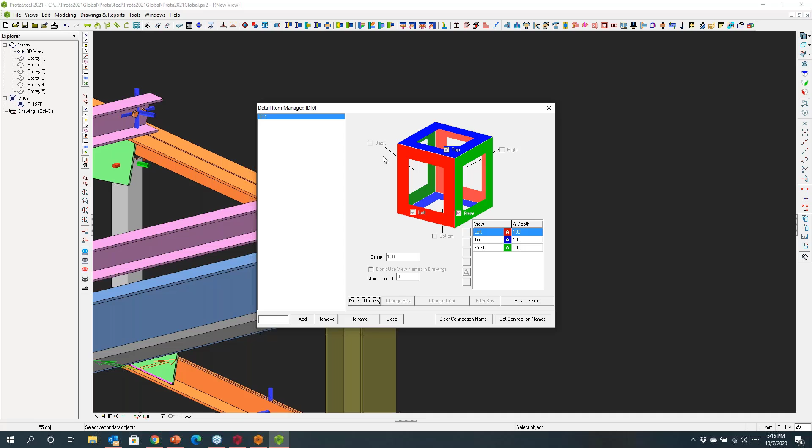Now at this point, I might just want to come and create some details. I'm just quickly going to do this, and then I think that will be enough for today. We can add objects into this detail of the ones we'd like to connect, and we create views around this joint. Here I've created different views, and you can have almost like a camera where you can choose the views of that joint you wish to create. You can add a 3D view in there.

Similarly, I could come and select this purlin here - let me just do that again. We can give it a name, so it could be called purlin connection 1. We add this, and we choose objects we want to include in the detail, and again it creates a little box around this, and you can choose the views you want to have of this. You might want to look from the top and maybe from the side, so you can choose these views in here.

Now, the way we work with this type of object or model is that we can slice and dice these views - we can create any views we like through this model to produce what we'd like to see. So here you can see an elevation of the truss there. That is now actually can become a drawing.

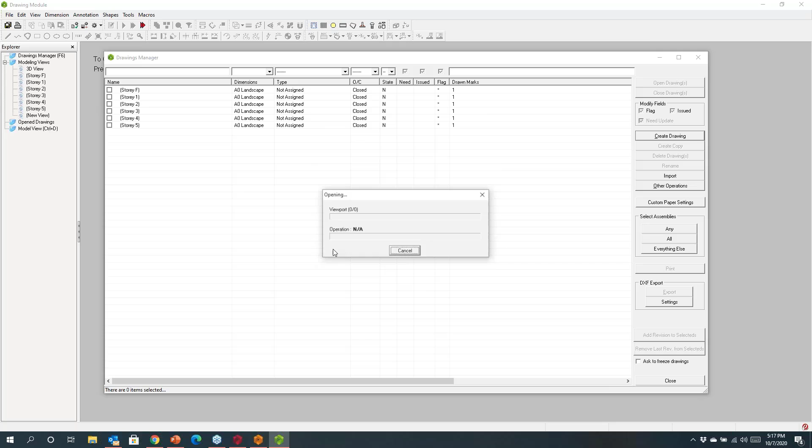If I just come to the drawing manager, we can create our truss drawing - I'll call this truss, give it a name, and hit OK. Then the views are available to be able to pull it into the sheet, so I can pick up that view we've created. Those views can be renamed, and you can see the view here.

This can be annotated - you can dimension this, you can put in your member labels. You'll also notice there are boxes around these, and if I just click on our little box here, it will go away and number that out, and then you can see it's now drawn these up over here. So those views that we took have now been detailed out - you can see the detailed drawings here.

These are adaptable, these types of elements here, and all this can be done in here. You can annotate these if you want to add things like bolts in - you can put the bolts in. If you want to add dimensions, you can just come in and convey what it is you're trying to present within the connection detail.

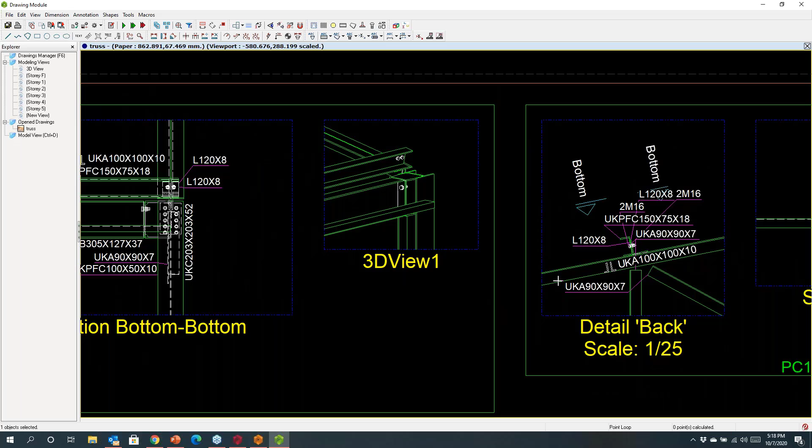You can see the 3D view there that we've got - again that's been created, and obviously also got your purlin connection there. You'll notice these have been labelled, so that's PC1, and over here we had the truss one. These can be labelled, but if we come back to here, you'll notice they're referenced here. What we've also done with this 2021 release is we understand what's similar, so connections are automatically grouped against the model, and automatically you can see what's similar. So these two other connections are recognised as the same, and it's labelled those accordingly, as you'd probably like to do as part of the steelwork.

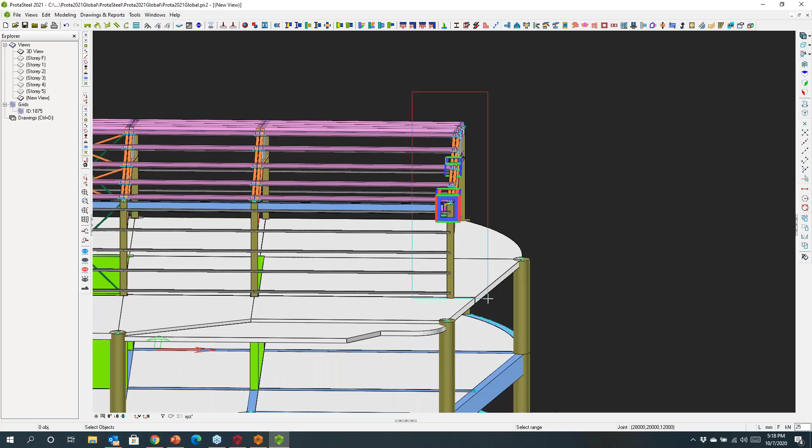The last thing I might want to do in this model, and the last thing I'm going to show, is grab this truss. We can come in and number the elements within the model. Then I can ask the program to take that selected truss and create my assembly drawing, so it can take all this connected information we've created and build our assemblies automatically. If you're wanting to create fabrication information and move into shop detailing production, we can automate this process once you've got the connected model. That's just finishing off, give it a second and we're done.

Then I can go back to our drawing manager, and if I click on this, you can see some of the drawings have been pre-populated. It's now building that drawing for us, and we can see all the components that have gone into creating the details we've asked it to draw. Here you can see the truss, and all the real detail going into the welds and joints. All this information is automatically generated from this model, including all our cutting lists and bulk material lists. It's really fantastic if you want this type of information, maybe for a client demanding this level of detail—it's available to you as part of the system.

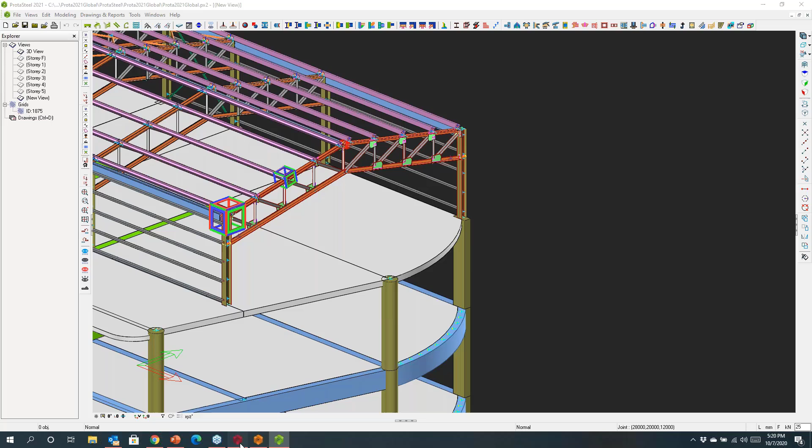So I've really covered a lot of ground today. I know you've seen a lot—we've been through a lot here, looking at many different aspects of the system. I won't show anything further than this. Just let me see if I can tease you with the 3D rebar detailing.

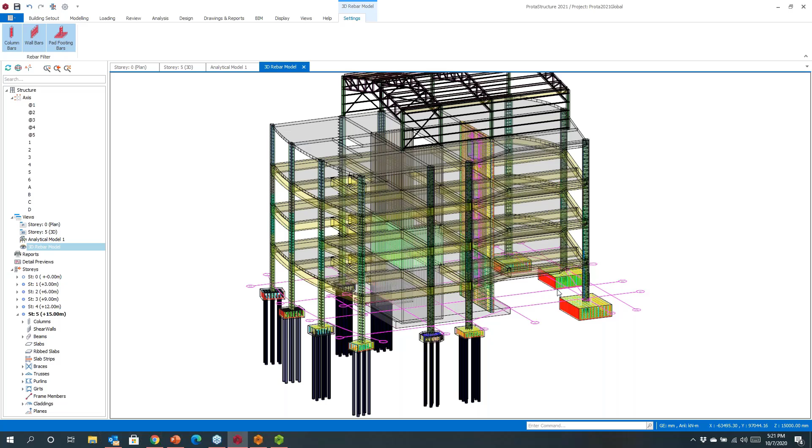The final thing I'm going to show you is that in the model here, you can start to lay out all the 3D rebar against the model. We're starting to work on this technology to integrate things like 3D rebar into the physical model. Here you can see your foundations, you've got my pile caps there—all of this is being detailed out, including the walls and columns, so you can get a feel for how this will be constructed. Moving forward, we'll make this information available to other BIM platforms, populate 3D rebar against them, and enhance these capabilities inside ProtaStructure.

So I've talked enough on this—I'm going to conclude and take you through some quick slides to finish. I hope you've enjoyed this. I know I've been going very fast, but we've got some great things to show, and that's why I wanted to spend time taking you through that. Today has really been about showing you how we're integrating that whole modelling, analysis, design, and detailing process into one, going right through to detailing, down into fabrication. I did touch a little on BIM and being able to use and integrate various pieces of information. All of this is aimed at giving you a complete solution.

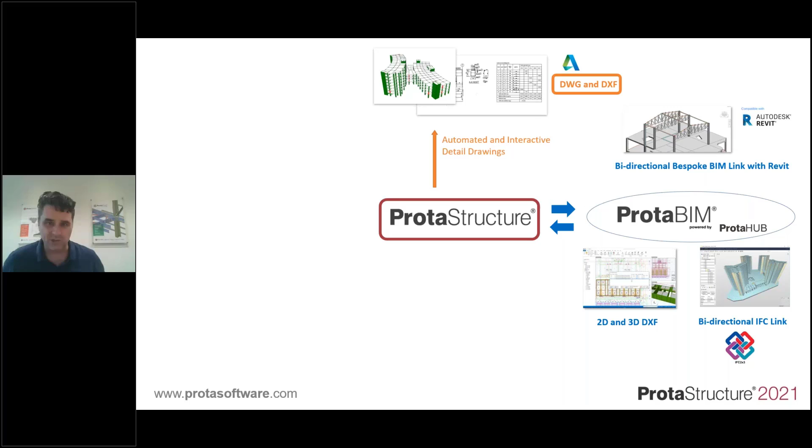So ProtaStructure integrates with BIM in different ways, producing your detailing information—concrete detailing, steelwork detailing. We've got a very open platform; you can share analytical data out to other programs, as well as provide all your design and reports in here as well.

Now, we've continued to develop new codes of practice. In this release, we've added quite significant enhancements to the American codes. There's been work done supporting the Thailand standards, the Indonesian standards, and standards in the Philippines. We've also enhanced our Eurocode standards—we now support additional national annexes, and Poland is also supported. We've broadened the scope of our general code coverage, but we're not stopping here. There are a lot more codes of practice currently being worked on, and that's coming very soon. So if you're tuning in from somewhere like India, don't be disheartened—we haven't forgotten you, and there's a lot of new development work being worked on as we speak.

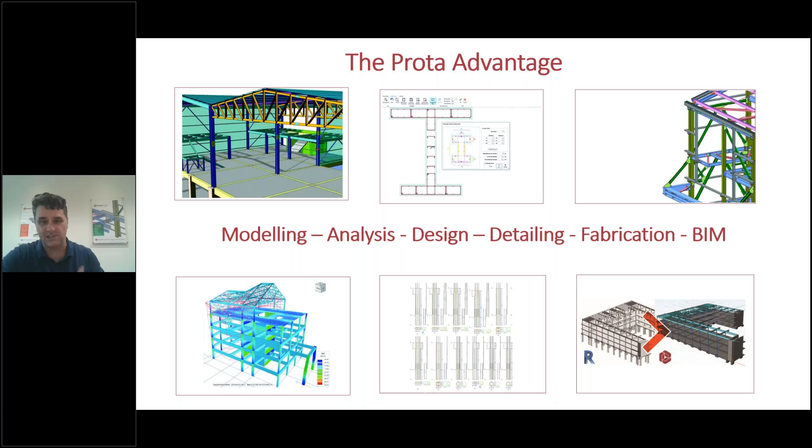So I hope today I've been able to highlight the real advantage of having a seamless, integrated platform that goes end to end, from modeling, analysis and design right through to detailing, fabrication and BIM. This is really what we have with ProtaStructure 2021. It's a fantastic piece of technology, and it's really been coming together. We think it's a game changer. It's really going to change the way you design and deliver your projects in the years to come, making design and detailing very efficient, very competitive, and very profitable for businesses taking advantage of this technology.